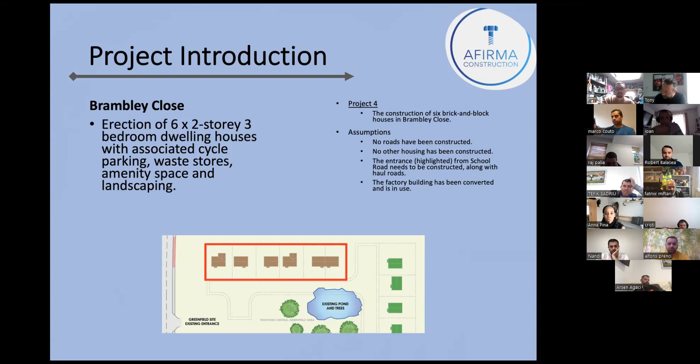We are Afirma Construction, and we are delighted to have you here and to have the opportunity to present our proposal to you. So a little introduction about the project, Brambley Close. It consists of the erection of 6 two-story, 3-bedroom dwelling houses with its associated cycle parking, waste stores, amenity space, and landscaping. Basically the purpose of this meeting is to cover how we are going to deal with the general health and safety management of this project.

So our statement to you, as our client: Afirma Construction is committed to deliver this project without fatalities, without failure, and to uphold the true culture of safety first. We are going to adopt industry best practices, foster a collaborative working environment, and very importantly, deliver this development to the highest quality.

Okay, to begin, we are going to go through our agenda. These are the points that we are going to be discussing now. And my colleague, Andre, is going to be presenting the site plan.

Hello everyone, I'm Andre, one of the managers, and thank you very much Anna for introducing me as well. I'm going to go through all the site plan layout with you guys today. I don't know if you can see my screen at the moment, so I'm going to point with my arrow. Anna, she just let me present it in the proper way.

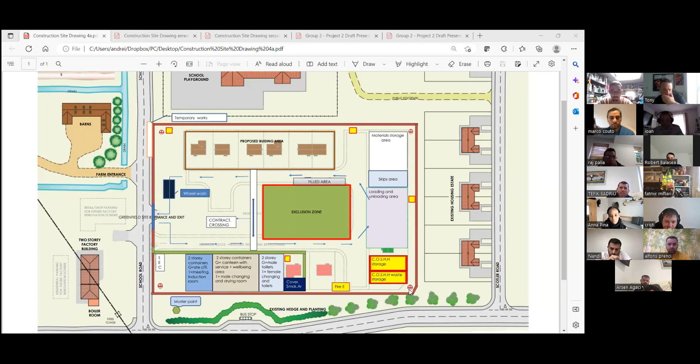So as you can see, this is the site boundary which will be enclosed, including being aware of the environment around us, so you can see all the green area. The site entrance is going to be from Brambley Road towards the school road. We're going to turn right on the blue gate for the vehicles. You can see we adopt a one-way system plan.

We're going to have on the site a maximum of 50 persons. We are prepared for more than that if we need to, but the maximum persons allowed are going to be 50. The main pedestrian and contractor entry is going to be from this point here, where we're going to have security in place 24/7.

They're going to go through the turnstile with biometric entry or by car, depending on everyone's options and what they choose.

As you can see here in this area, we've put 6 containers, which are going to be 2 stories, one on top of the other. As the first part of it, they're going to contain the site office on the ground floor, and we're going to have the first aider room as well there, and site office, contractors office as well.

They're going to be on the same floor. On the first floor, we're going to have a meeting room, and we're going to use it as the induction room as well. The second row of containers, which are going to be the same 2-story containers, we're going to have the ground floor with the canteen.

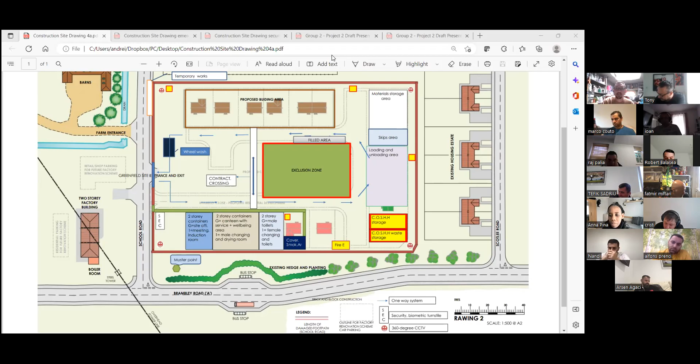Yeah, please, Anna. Good morning, ladies and gentlemen. I'm Ion, the logistics manager and health and safety manager for the site. I've been working for Afirma Construction for 1 year, and I'm going to describe now the emergency response and guide for the site. We make emergency planning before the commencement of any work on site.

That includes 7 types of construction site emergencies, which are fire, explosion, chemical spill, medical emergency, natural disaster, bomb threat, and violence. The emergency phone number in the UK is 999, and 111 for non-emergencies. The nearest hospital is Royal Surrey County, which is 15 miles away from our site.

The emergency plan for our site includes the site address, evacuation routes, types of emergency personnel, emergency contact details, and emergency risks. The emergency plan should include the estimated response time, like how far an ambulance is from us, and the fire brigade.

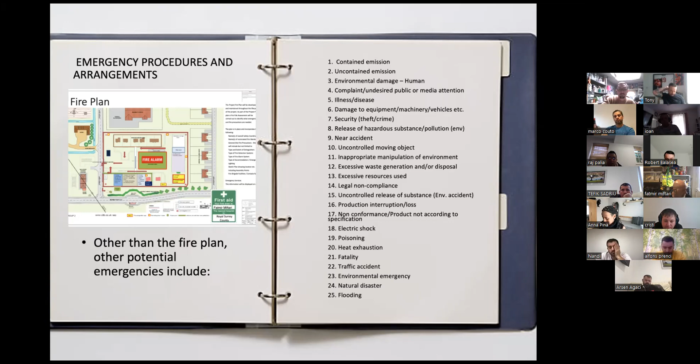Another thing included is electric shock, poison, fatality, traffic accident, environmental emergency, natural disaster as mentioned before, and damage from equipment, machinery, and so on. I'm going to hand over to my colleague Anna.

Regarding the safe system of work, we are going to have a very robust and comprehensive system in place for this project. It will include our standard risk assessments and method statements, and we are also going to be receiving and reviewing method statements from each of the subcontractors we have on site.

Their statements are going to be reviewed and approved, and need to be signed by the operatives before they start work. We are going to be carrying out weekly toolbox talks, weekly inspections, monthly quality inspections, and we are going to review our health and safety performance and plan every 2 weeks.

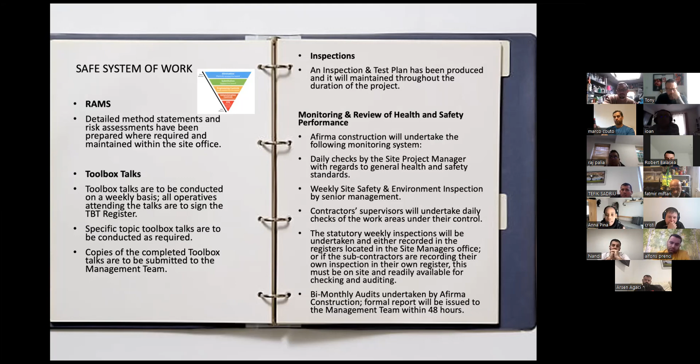And my colleague Raj is going to talk about our traffic management plan. Hello, my name is Raj. Good morning, everyone. I'm an assistant site supervisor.

School road entrance and exit. Traffic management: we are going to have a one-way system to avoid reversing a vehicle on site.

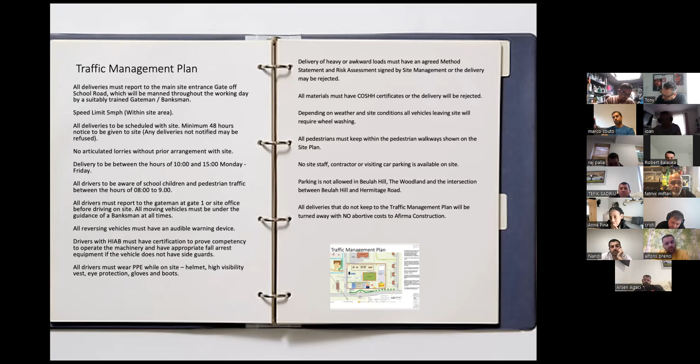Traffic management should be planned, covered in the site induction, to minimize risk to pedestrians by providing separate routes and entrances for vehicle and pedestrian, using segregation where possible, and ensuring the site entrance and exit minimize traffic hazard on the public road. Main points: entrance and exit, walkway, crossing, visibility, obstructions, barrier.

Provide a separate entry and exit gateway for pedestrians and vehicles. All deliveries must report to the main site entrance gate on school road, which will be manned through the working day via a suitably trained gateman, banksman, or traffic marshal.

Speed limit 5 miles per hour. All deliveries to be scheduled with the site with a minimum 48 hours notice given to site. Deliveries to be between the hours of 10 to 3.

All deliveries to be aware of school children and pedestrians, and of traffic during rush hour, 8 to 9.

All drivers must report to the gateman or site office manager before driving on site. All moving vehicles must be under the guidance of a banksman at all times. All reversing vehicles must have an audible warning device.

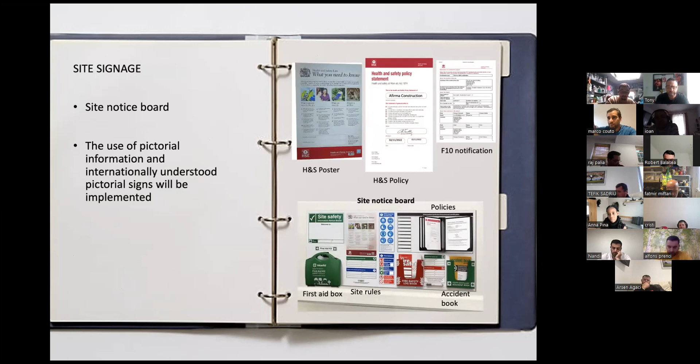We've got the F10 form also. Emergency contact, no smoking, emergency route restriction, assembly point, and we've got 7 mandatory signage types on site: prohibition, warning, danger, fire, emergency, information and restriction.

We've also got one near the M1 from the entrance, from the gate, because our load is coming through the road. We've got a sign which says don't reverse without a banksman, just in case you're reversing. We've only got one traffic way, a single-way traffic.

We've got mandatory PPE signage by the entrance, also fire alarm signage pointing to all the points, a board with the project information, and HSE safety posters also on site.

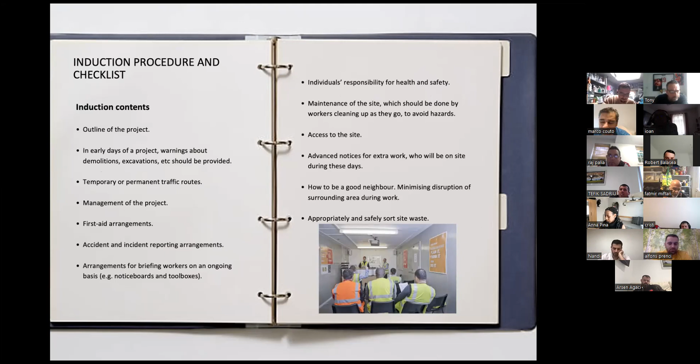And the other thing I want to talk about is regarding permits. No work can be carried out unless 24 hours advance notice is given, stating what's going to be done, where the work, which area is going to take place, and for how long it's going to be.

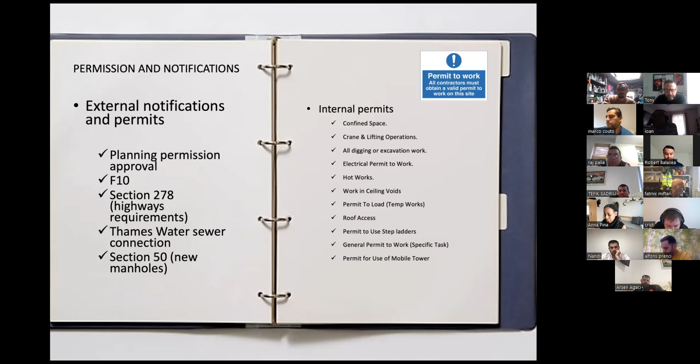I'm just going to pause now to... Anna, mental health policy, please.

Thank you, Fatmir. At Afirma Construction, we want to emphasize that we care about mental health as well as physical health. It's important for us to tell you, as our client, that we are going to be addressing issues regarding mental health. We have a policy in place, and our aim is to recognize that the workplace can be stressful, and it is a health and safety issue that we need to acknowledge. It's important to identify the issues and reduce any workplace stressors. For this project, we have created a number of initiatives for mental health, one of them being that we have appointed a well-being champion. This is Andre. He will be available to discuss privately with anyone on site if they want to talk about mental health.

There is going to be time out regarding mental health. There will be toolbox talks that are not just related to physical work, but also about diet, sleep, exercise, and coping strategies. Something we are very proud of is our initiative to have a well-being room. It will include a space on site with a table tennis table, dartboards, and a soccer table for people who feel the need to take a break and enjoy themselves.

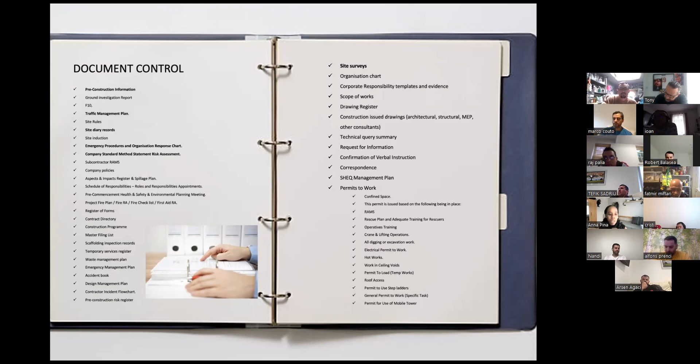Yes, perfect. Just wanted to go quickly through all of the document controls we are going to have on site. Obviously there are a lot of them, but basically, just to give you a quick overview, we are going to have the pre-construction information. All of the plans we've been discussing during this meeting will be on site. We are going to have all our emergency procedures, and compile all our method statements, construction drawings, and all of our permits and plans.

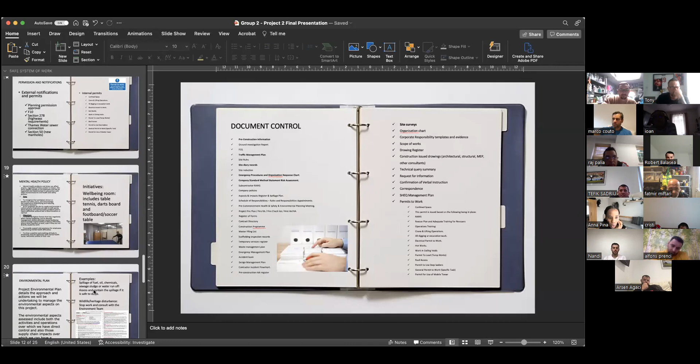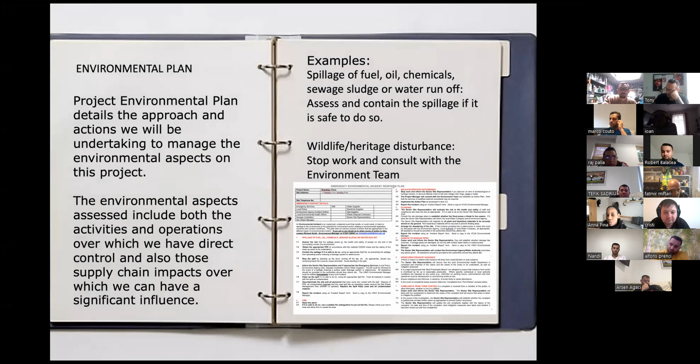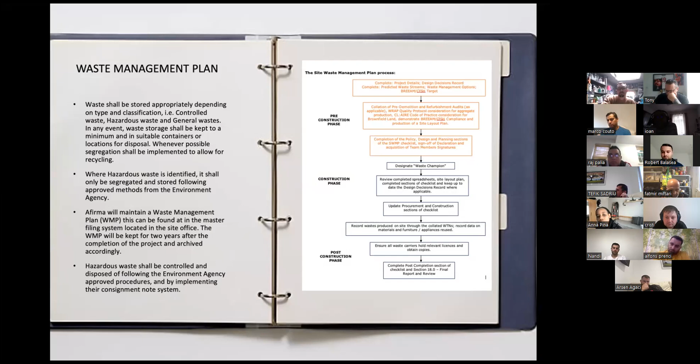And then finally, we have a couple of extra documents and plans to discuss. One of them is the environmental plan, which is basically to express how we are going to deal with environmental issues regarding this project. We also have a waste management plan in place, which will indicate how we are going to store and dispose of materials. We have a quality plan in place, and it's just to make sure that we meet all of your quality requirements.

And a service avoidance plan is basically to make sure that when we are doing the excavations, we make sure that we don't put a risk to any underground utilities.

Thank you very much. So thank you so much for your attention. This is our presentation, and now we are here to answer any questions.

Before we end the presentation, I must admit we're going to have some temporary works there. We are aware of all our neighborhood, and we'll do this in a minute. Anna, can you help me with the site layout please? We're going to have extra measures in place regarding deliveries and traffic, which could be a problem sometimes because the roads are so busy. We are in discussion with the factory CEO because they're going to have a future parking lot, and we're going to use it as our waiting point for the delivery vehicles. We are also aware of the overhead cables, the school playground, and the rest of the traffic involved.

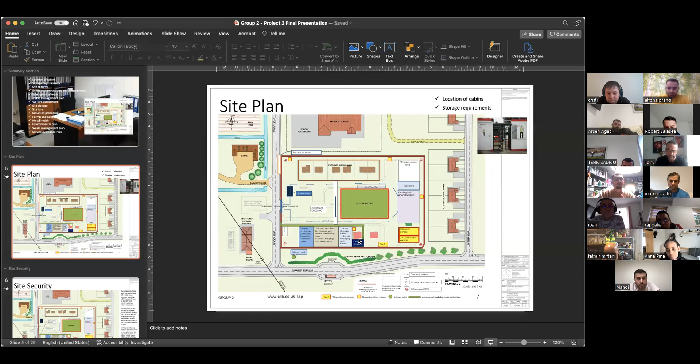So now it's a smoking area provided. It doesn't delimitate tobacco smokers from vaping, it's still going to be the same area used for smoking, because if you see the definition of smoking, vaping is still considered smoking. So it's not allowed inside, just in the special areas provided. The areas are provided together for both, so it's not allowed in any other place than the smoking area provided on site.

Okay, thank you very much. Second question, if you want to stay here, what is that big exclusion zone in the middle?

The big exclusion zone, we didn't present it, my fault, sorry, because when I presented the site layout I didn't cover it. Under this exclusion zone we have a pond that's been there for about 30 years, with some environment and trees that are protected by law. The red line around the green area is the exclusion zone, it's fenced and protected for the wildlife and everything.

The filled area on top of it is the same, because the pond we have on the side, we've been instructed to fill it regarding the route. I don't know if it makes sense to you, I can explain more if you need more info regarding that. No, that's fine, thank you very much. Let me ask you something else.

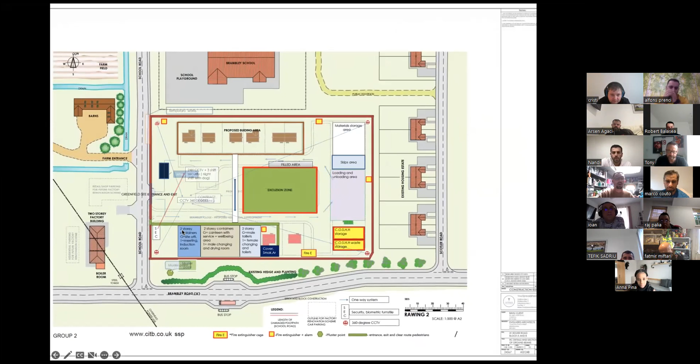So from the main road you'll see the green route for pedestrians and contractors, but they go inside where security is, marked in white. We're going to have a gate as well which allows disabled people to come into the site, and you go to the main contractors building where the managers and everything are. We have a ramp in place because we don't have steps on the ground floor, so there's a ramp for better access. The door is going to be a double door, a secure double door, which we open in case of use.

Do you have a toilet for them? Yes, of course. Male toilets can be used, and you're going to have a separate disabled one as well, in the first entrance on the right. It's going to be adapted for a wheelchair user, with the ramp and everything required, with the emergency button, the light emergency outside, and a handle to help them move in.

That's good, good. Now, I've heard you guys talking about toolbox talks happening weekly. What about a briefing? I haven't heard anything about the briefing. What's going to happen in the morning? Are you going to give the boys a briefing?

Every company has a supervisor on site whose duty is to brief the guys. When you say briefing, do you mean the type of work we're going to do today, the final plan? Yes. So it's every company's duty to tell the guys what the plan is for today and what the achievement is for today. As a manager from the main site, I cannot come to your company and tell you exactly what I'm expecting from you today, because I've already spoken with one of your managers or supervisors. I can't go there and gather all the companies together to go through everything.

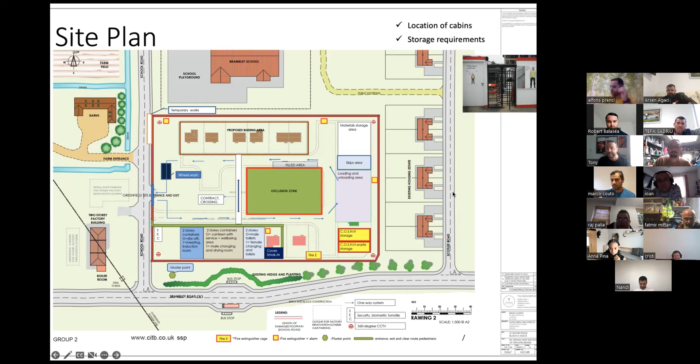I can see a fire exit, and I can see you saying you got 50 people still on the site, and you have just one fire exit. Yes, correct. If Anna, she's going to help me with the fire exit. I'm talking here, can you please listen till I finish? Okay, so you've got just one fire exit there, and you have people working on the north side. It's not only one fire exit, we have 2.

Where's the second one? If you look at the fire plan, you're going to find that the main entrance, where the vehicles come in and out, that's it. But when the fire happens, you're not going to see where you say you need to have the signs, I don't see it. We have signage everywhere on the site. But I couldn't put it on this plan.

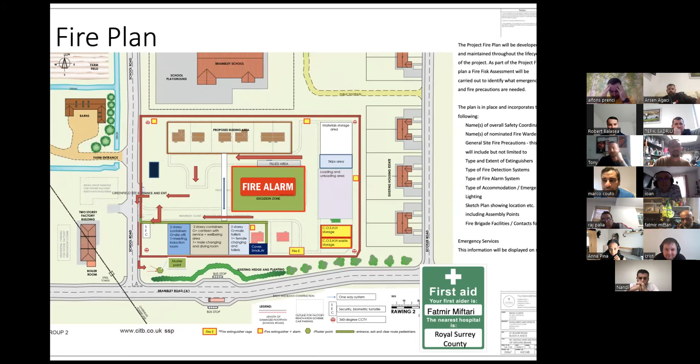Are we talking about this plan? You don't have it on there. We mentioned to put it. Come on guys, hold on a second. Why don't you let me finish? No problem, I can answer it.

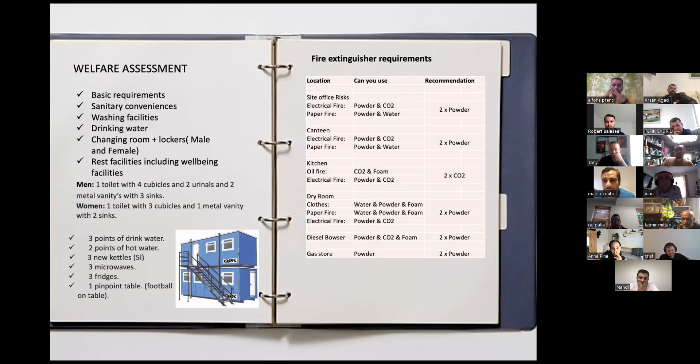Look, one second, if you allow me to explain to you. We have 1, 2, 3, 4, 5 points of raising the alarm on the site, where we have the fire extinguisher, we have fire exits, we have 2. You have two big gates, they're only going to open the vehicle entrance, and you put the pedestrian sign, fire exit is only one. I don't see two, I don't see three.

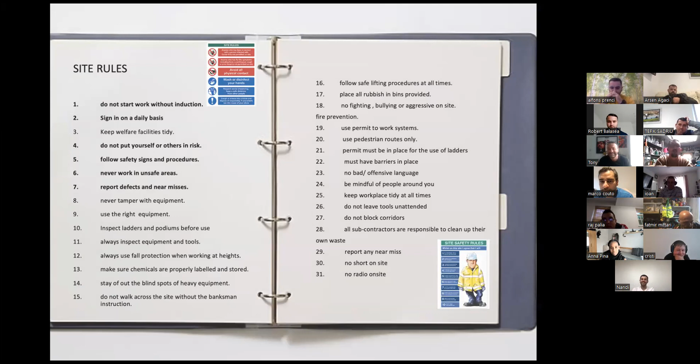It's only one, right guys. I do understand your concern, but the thing is, we cannot put all the symbols on this plan for now. Why do you have it put on the side, okay? We say why you put on the side, display. Andre, why have you put 4 cameras on the corner, why didn't you put 4 signs for the fire exit then? Guys, we have the signage on site. No, you don't have it. It's not necessary.

We need to bring the signage like arrows on the side. The danger on the side is when the fire happens, how are you going to escape 50 people on the exit? I do appreciate your question, but to be honest with you, it doesn't make sense to me. How I said to you, that is you don't want to listen. You don't want to listen.

No, I'm saying shall we do lunch? Shall we? Shall we do lunch? And the site is displayed already, guys. You bombarded me with some questions, but Andre, it's not relevant. I'm bringing an end to it, please.